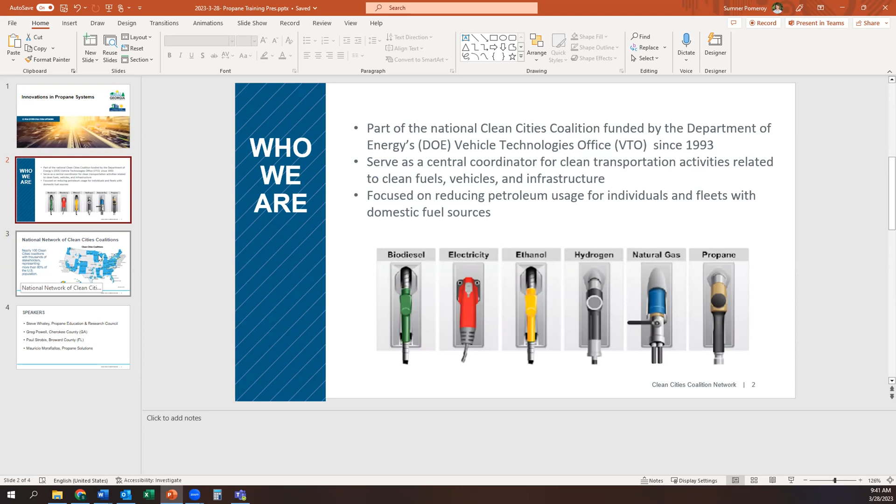Yeah, I could definitely do that - that we focus on all the fuels, not just one in particular. Yeah, if there's anything you want to add, essentially just jump in, but don't feel like you have to do it. I don't feel the need to be the only person that speaks, so I want to make sure your voice is in this as well.

You're so cute, I love it, Sumner. Well, what I was thinking too is you introduce yourself, then I'll go, and then you can go into who we are. And then if you want, you can go to the next line and I'll jump in and say, we have nearly 100 coalitions across the country. Here's a map of all our designated clean cities coalitions - notice me in Southeast Florida. I know, that's what I was thinking - a little difference between Florida and Georgia is that we have multiple coalitions where you guys have a state run. And then I was thinking, did you want to do the next slide and say the speakers, on the agenda today we have, blah blah blah, and do that.

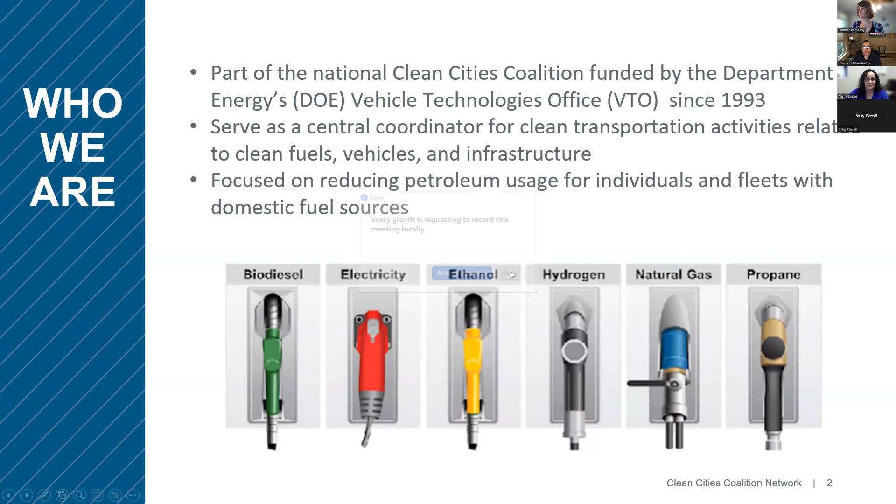And just to give you a little background, we do have a national network of Clean Cities coalitions. We have nearly 100 coalitions across the United States. As Sumner mentioned, her coalition covers the entire state of Georgia, whereas ours is a little different. We have 4 coalitions within Florida that cover the most populated areas, which we're looking to hopefully expand within the Panhandle.

Our agenda today: we have Steve Whaley from Propane Education and Research Council, then we'll get into Greg Powell at Cherokee County up in Georgia, then Paul Strobis from Broward County, Florida, discussing his paratransit fleet, and we'll finish with Mauricio Morafilalos with Propane Solutions. I'm going to go ahead and pass it over to Steve.

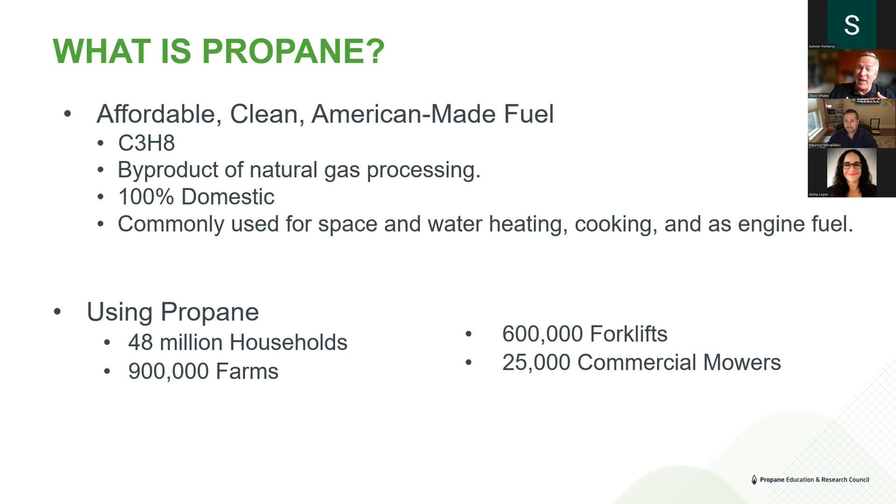But a lot of times we get confused with CNG, which is our sister fuel, natural gas. We are one of the natural gases, the methanes, the pentanes, the ethanes, the butanes, the propanes. All of these we get out of our own soil here in the United States.

But we operate as a liquid. So when you shake your grill cylinder while you're getting it refilled and putting it back up underneath your grill, it is a liquid inside there, and it stays a liquid unless you put it in 42 degrees below zero. Then it starts to boil off. So we keep it at about 100 psi on a 60-degree day, and it stays there. It's not very much pressure at all.

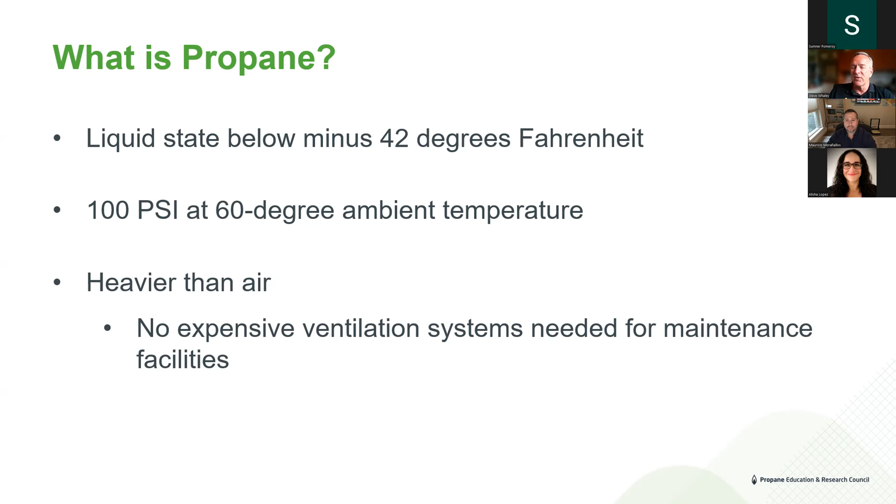It's heavier than air. So if you're working on vehicles inside a maintenance facility, you don't have to put the methane detection at the top. You don't have to do the evacuation of that air and all of those very expensive things. If you're certified for gasoline and diesel, you're going to be fine for propane because it has the same properties of being heavier than air. So you don't need to spend all that money, but it is a very hydrogen rich fuel.

I like to call it a stable hydrogen fuel because we stabilize it with those 3 itty bitty little carbon atoms that are in that, surrounded by 8 hydrogen atoms, unlike gasoline and diesel, which are very heavy on the carbon side. And that's one of the things that we're trying to get rid of.

But we have 2 sources of propane, regular propane and renewable propane. But we'll talk a little bit about renewable propane at the very end. But both of them operate exactly the same way because they're the exact same molecule, just come from different feedstocks.

But both of them are non-toxic. They can't contaminate the water. They can't contaminate the air. They can't contaminate soil. So the EPA doesn't even regulate our fuel stations because they can't hurt anything in that regard. Unlike a gasoline or diesel tank that can seep and you have to spend millions of dollars to clean it all up. Propane is non-toxic.

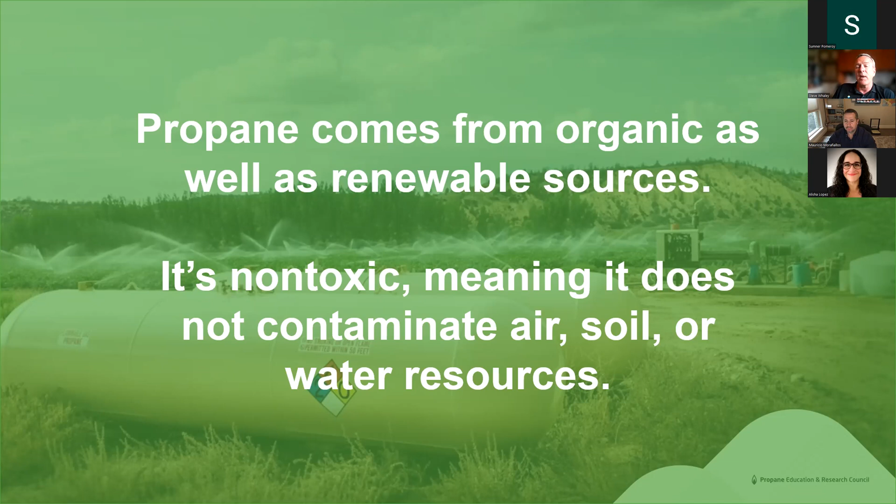You can breathe it. We add a little bit of stink to it. So if anybody can smell it, that way we know we have somewhere it might be leaking.

Everybody has a pathway to zero, every alternative. And I am so glad Clean Cities is fuel agnostic when it comes to this, promoting electric, promoting CNG and hydrogen, and of course, propane.

Our pathway to zero for propane goes like this. We have 2 toxic emissions that we're very worried about, particulate matter and NOx. These are the ones that cause the respiratory illnesses for kids on school buses that get real close to those diesel exhaust fumes. We have no particulate matter filter that goes on our engine because we don't have the particulate matter. So that's kind of a gimme.

We're real good there. NOx emissions, West Virginia University, same people that busted Volkswagen, say that we're 96% cleaner than the best in class diesel.

In other words, the same diesel bus, same propane bus, same make, model, year on the same route - they put mobile emission equipment on there to find that we were 96% less in NOx. We have a tremendous amount of reductions, especially with some new engines that were coming out.

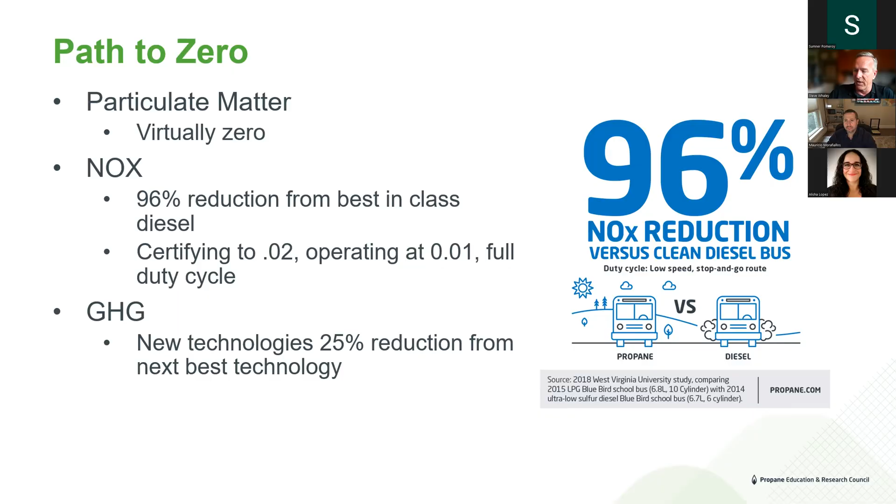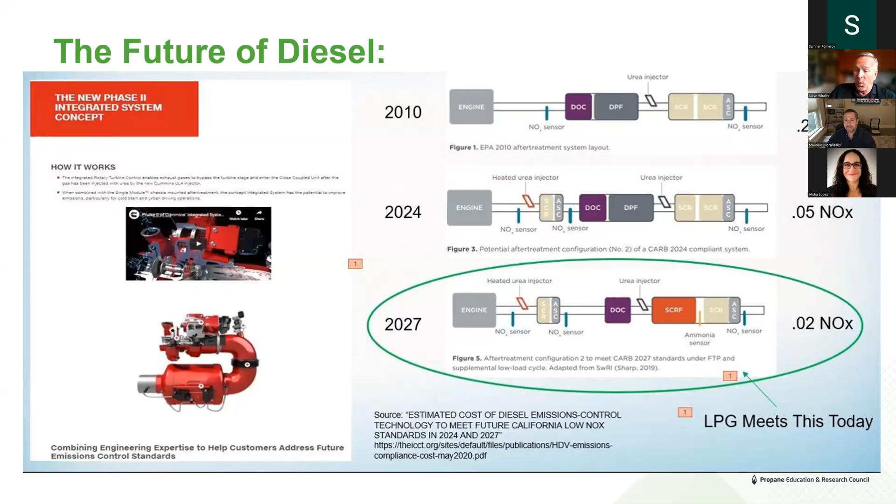Diesel is on kind of its last legs. We're under the 2010 regulatory level of 0.2 NOx. So if we're right here with 0.2 NOx in 2024, we're going to reduce that by 75%. So if you love diesel emission reduction equipment now, you're really going to love it in 2024 because they're going to have to reduce and add a whole lot more to get it all the way down to 0.05. Then in 2027, it gets cut in half again to 0.02. Propane engines today are already operating at 0.02, so we're way ahead of the curve as far as emissions go.

Roush Cleantech is one of the vehicle providers. This is if you're ordering a new vehicle, whether it's a strip chassis, a cutaway, or one of the trucks all the way up to an F-750, or the Blue Bird school buses - Roush puts their 7.3 liter engine in all of these platforms, and again, it meets that 0.02.

If you have existing gasoline vehicles that you'd like to turn over into propane, folks like Alliance AutoGas have thousands of EPA certificates of conformity for various platforms - Ford, GM, Isuzu, Chrysler - including a very popular one, the Ford Transit.

School buses is where we've had a lot of success. We have over 1,000 school districts now operating on propane, and once they get started, they don't stop.

Just a couple of weeks ago, Randolph Township in New Jersey reached its full 100%. I've got Kay Cornelius in Upper Minnesota - she has the largest school district by square miles, 4,200 square miles she covers, and 95% of all her routes are covered by propane.

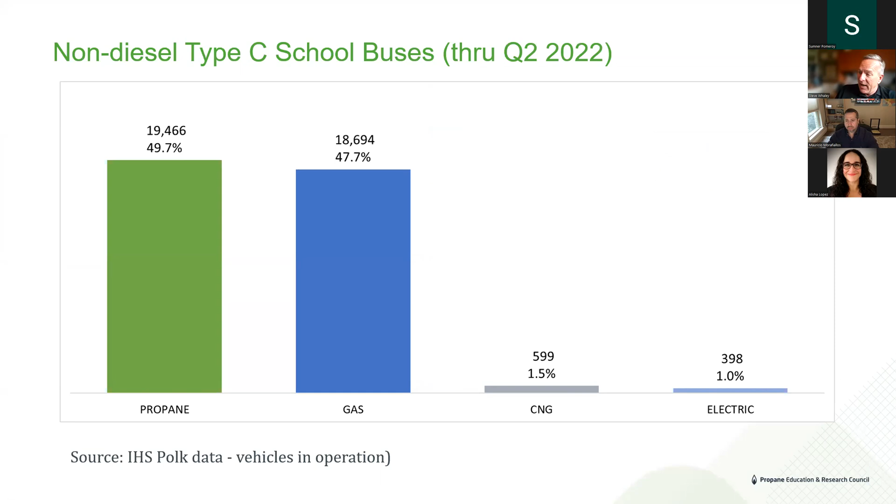We move over 1 million kids every single day, but 22,000 school buses operate on propane today. Just to give you an idea, as of Q2 2022, the Polk data revealed we had 19,000 of those on the Type C platform. Gasoline is in there as well. CNG has almost 600, and electric in the Type C had 398. That gives you an idea - electric buses came out about 10 years ago, and so did propane.

So we've got a really good market success with that, but not just in school districts. Parcel package - we have UPS, we have FedEx, we have DHL, but the latest one to come on board were the contractors for the United States Postal Service. They handle 70,000 of the 92,000 routes there on these Class 6 and 7 straight trucks.

And just for you Clean Cities folks, I know you get graded on the number of gallons that you displace - these trucks are averaging 18,000 gallons of fuel a year per truck. They drive 7 days a week, they slip seat these things, they're driving 24 hours a day. So if you want to displace a lot of diesel, you can do that with propane with the United States Postal Service contractors.

Nestle Water started about 5 years ago with 5 trucks, kind of like a little PR campaign. Well, they found out what they could do with emission reductions and fuel cost savings. Now there's 1,300 of these water delivery trucks that are out there.

Paratransit's been the same way - they're averaging about 600 gallons a month nationwide. Greg and Paul will tell us a little bit about what they're doing. But just to give you an idea, chassis costs have gone up tremendously, and Greg can attest to this as well as Paul - for a gasoline version, you're going to spend about $165,000, for a propane version, about $195,000.

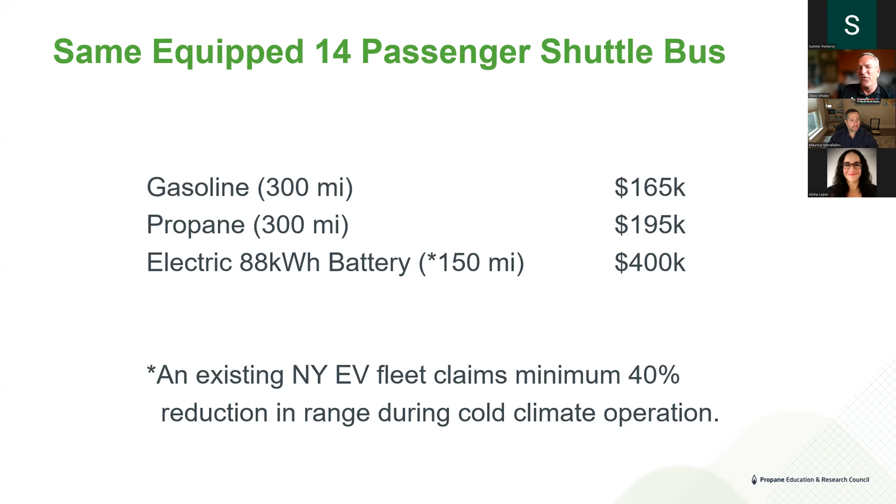That might be a little bit high, but I'd rather go high and meet expectations a little bit better. But on the electric side, you're really going to spend a shiny penny for that, and maybe not go quite as far. One of the fleets in New York doing this put out some numbers recently showing they lost about 40% of their range going to electric when the weather started getting cooler.

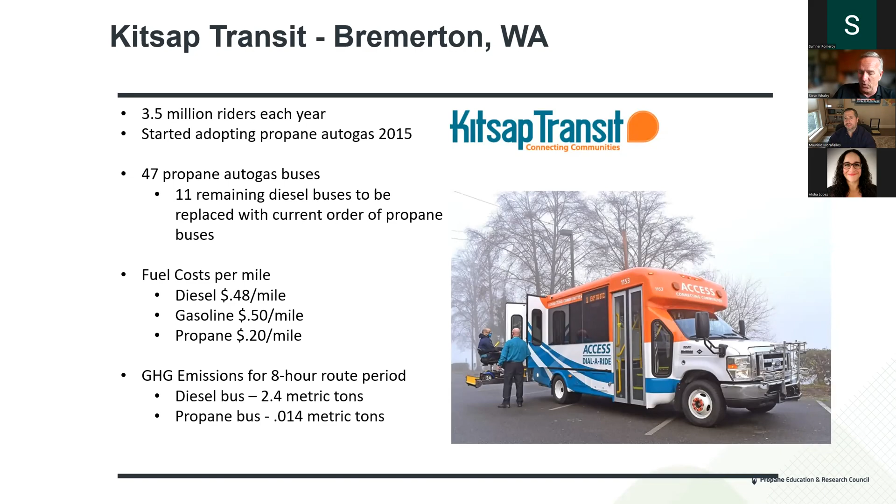That's pretty good, but look at the greenhouse gas reductions he's been able to achieve. This sustainability officer has measured 2.4 metric tons per diesel bus, and for propane it's 0.014 metric tons. So we're doing a great service there in Bremerton.

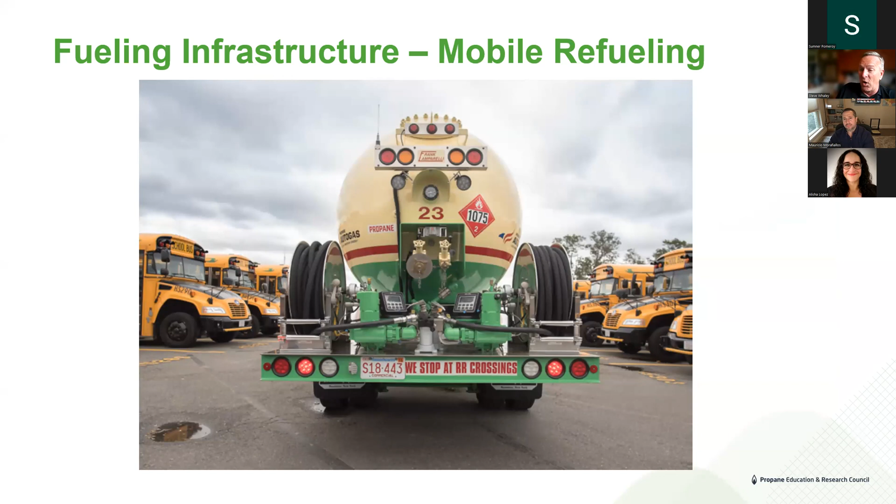Infrastructure. Now we're going to have Mauricio talk about the really cool infrastructure, but we have 4 types. We can do mobile fueling like the city of Boston does every single night on 400 buses. A bobtail truck comes in and fuels them all up because they don't have room for a fuel station anywhere in Boston in their parking lot.

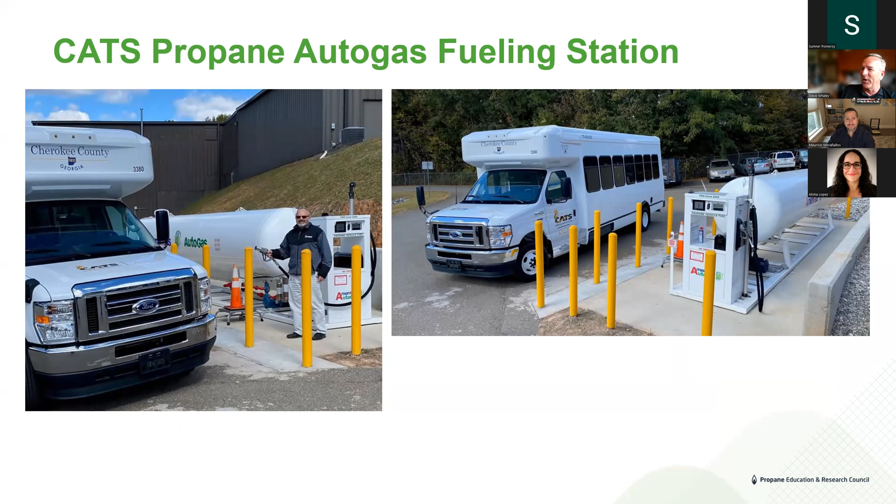We can move it around on temporary trailers to get it where people need it, but everybody wants one of these. This is our friend Greg Powell out in Cherokee County. He's filling up his buses for the first time. We're going to have him talk about what's going on there as well.

But up in Pennsylvania, everybody wants one of these fuel stations behind their gates so their own drivers can fuel them up, park them, and have that autonomy—not having to go to gas stations, not having to get coffee and donuts and everything else, but fuel up right there safely and very affordably.

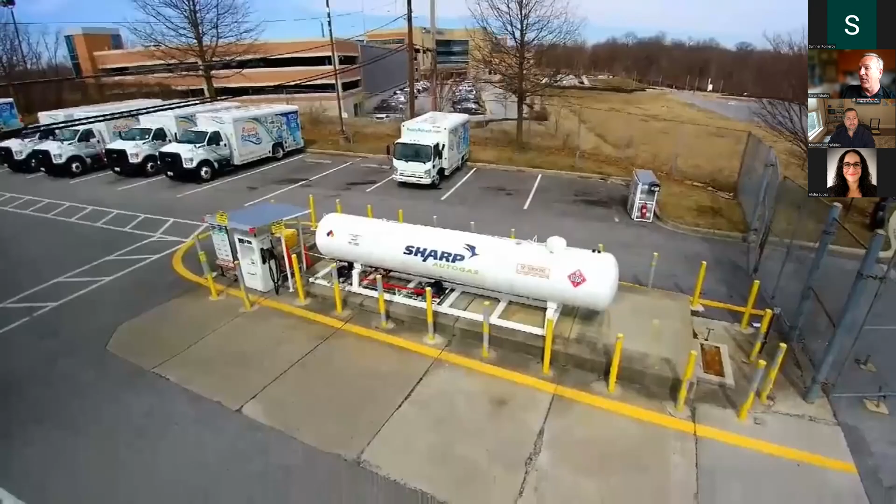This is in Baltimore with those Ready Fresh water delivery trucks, a 2,000-gallon tank. This setup here is about $50,000. Everybody in the propane fueling business will give these away if you sign up for a fuel agreement with them and lock in a price for 1, 2, or 3 years. You get a price you like, as well as the stability of that, and a fuel station that's maintained by that fuel provider as well.

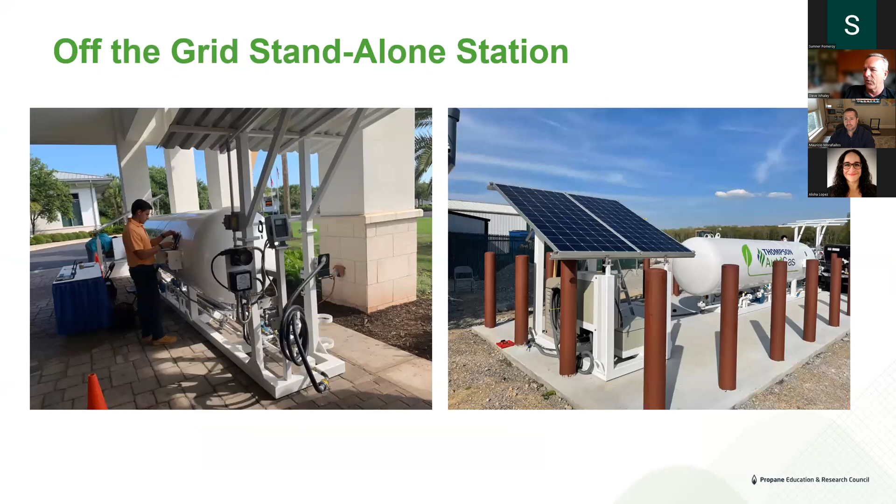Different configurations. When you get up to 600 or 700 buses like they do in Texas, they have three 30,000-gallon tanks behind there, but the same dispenser is operating and filling it for drivers to be able to fill up. I'm not going to steal Mauricio's thunder—this is a little bit more about his system.

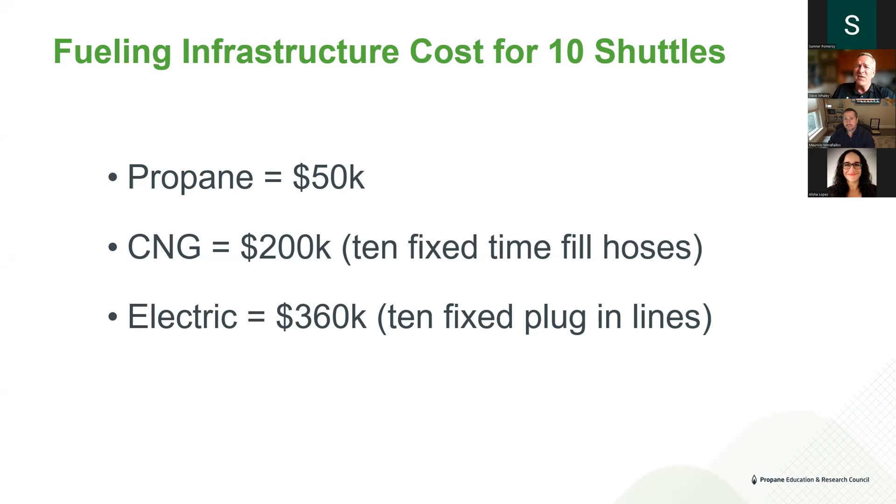Just to give you an idea of that cost comparison on infrastructure, it's one of propane's greatest assets because we can set up this infrastructure anywhere, even in the most remote areas—very resilient. We move propane in pipelines, in rail cars, in transport trucks, and then all the way down to what we call these bobtail trucks with 3,000 to 4,000 gallon barrels. The important part is in a storm or any kind of catastrophe, we can use these trucks to fill up, because we have intermediate storage of propane in every single community in these United States. Even though it moves on rail cars, pipelines, and trucks, we store it intermediately in what we call bulk facilities, so we can pull it from there without electricity, and put it in your facility without electricity.

Future of propane, renewable. But before we get into renewable, let's just look at the carbon intensity of what the EPA says about regular propane and the regular grid. The grid is very diverse in its energy sources, but when you average all of the wind, solar, hydro, coal, natural gas, and nuclear, you have a carbon intensity assigned for every single state.

Hopefully nobody here is in Wyoming—326. I'm not sure why we would want to do an electric vehicle there. But then you have really, really clean states in the Pacific Northwest because of the hydro, and even in Vermont. Vermont's the cleanest state for electricity in the United States.

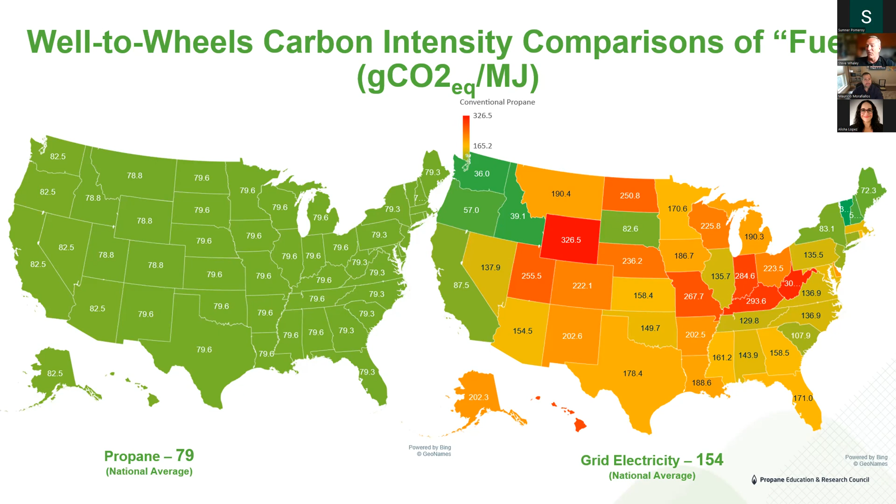The grid intensity average for propane is 79, versus 154 for EV. So let's look at what that looks like in Georgia. I did this analysis for Georgia, but not for Florida yet—I can do that for you later. I wanted to measure what regular propane operating those vehicles would look like in Georgia. We're minus 7.3 tons of CO2 less than the same electric mid-duty vehicle operating 200 miles a day, and 0.08 less in NOx than the electric vehicle getting charged in the state of Georgia.

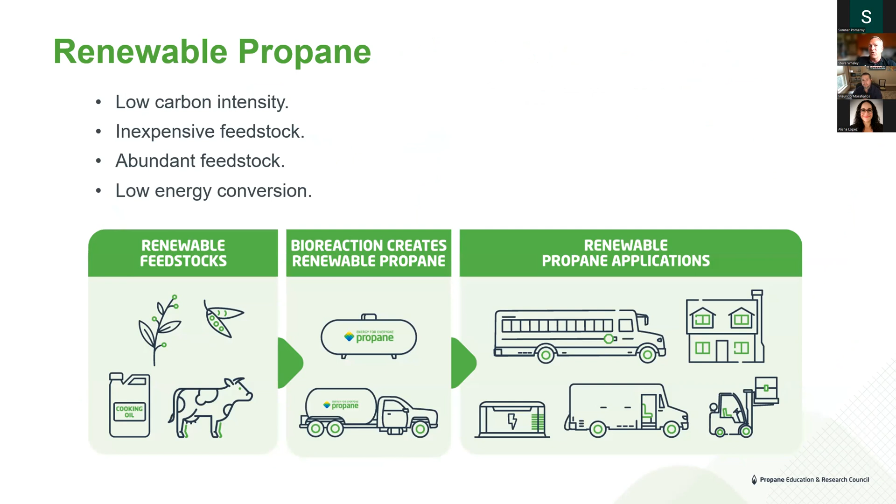But renewable propane is exactly the same infrastructure-wise. It's very low carbon intensity because of the pathways involved—we use cooking oil, dairy manure, canola, all kinds of feedstocks. But it's the same infrastructure, the same engines, nothing changes. If you're using regular propane now, you can move into renewable propane anytime.

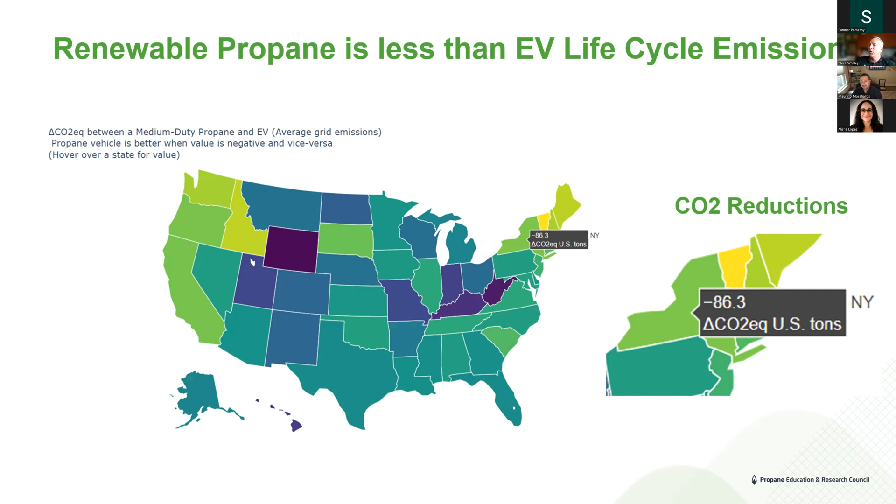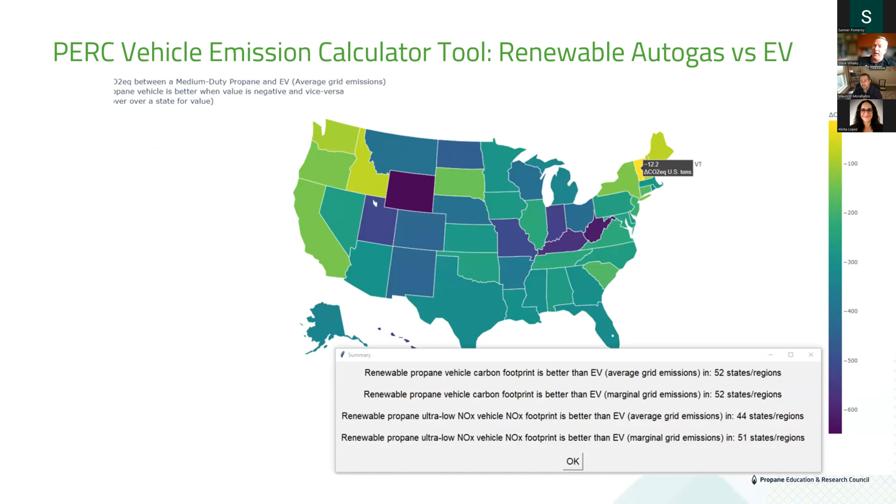Even in the state of Vermont—well, actually New York has the cleanest grid—when we use renewable propane, it's 86 tons of CO2 less than that grid. Here it is in Vermont, the cleanest electric grid on the planet because it's all hydro. We're 12 tons less CO2 when we use our renewable propane.

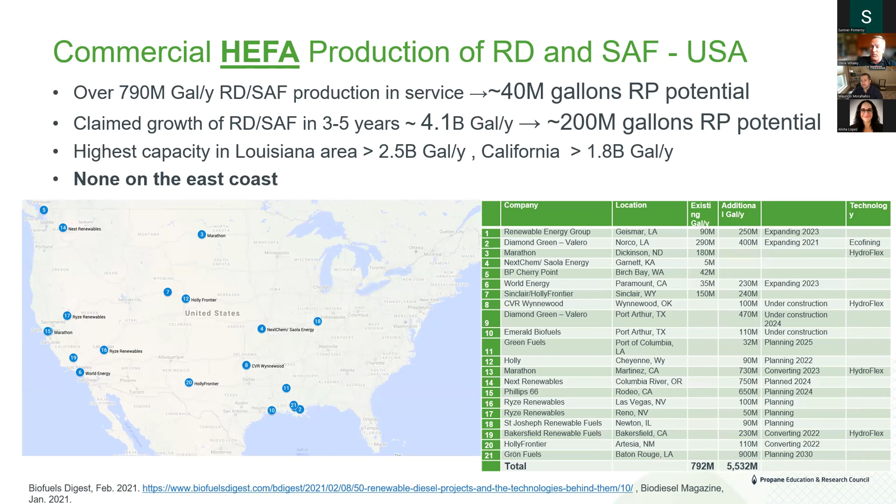We have renewable propane coming up all over because of its popularity with renewable diesel and renewable jet fuel. All these manufacturing facilities are coming up—New York, Sacramento, even just south of Richmond, Virginia, in Petersburg, where we did a ribbon cutting. They wanted their entire municipal fleet running on renewable propane as well. Up in New York, we've got it on rail cars going straight up there.

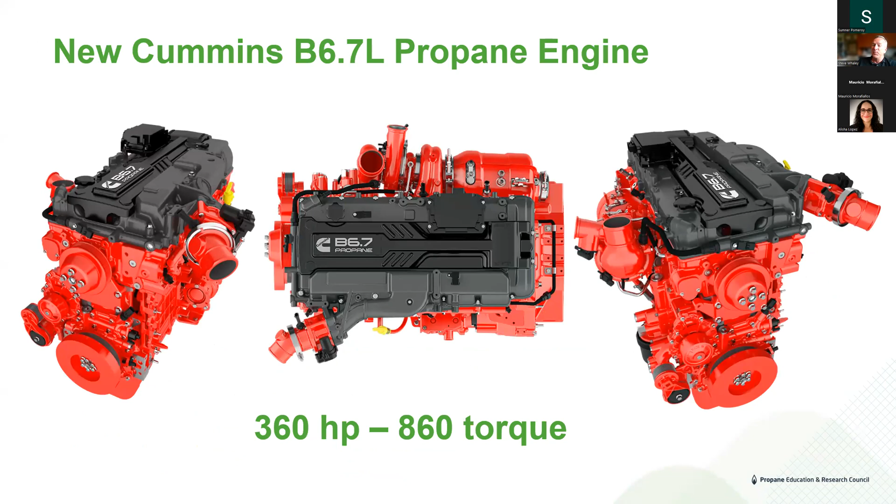Not just the fuel is changing, but we also have major engine developments. The Cummins new engine, the B6.7 propane, was announced just last year and is coming to market in spring of 2025. It has the highest horsepower and torque rating of any in that class, and it even beats diesel—they had to tune it down a little because they're a diesel company. This 360 horsepower, 860 foot-pounds of torque engine is a beast for medium duty trucks and buses.

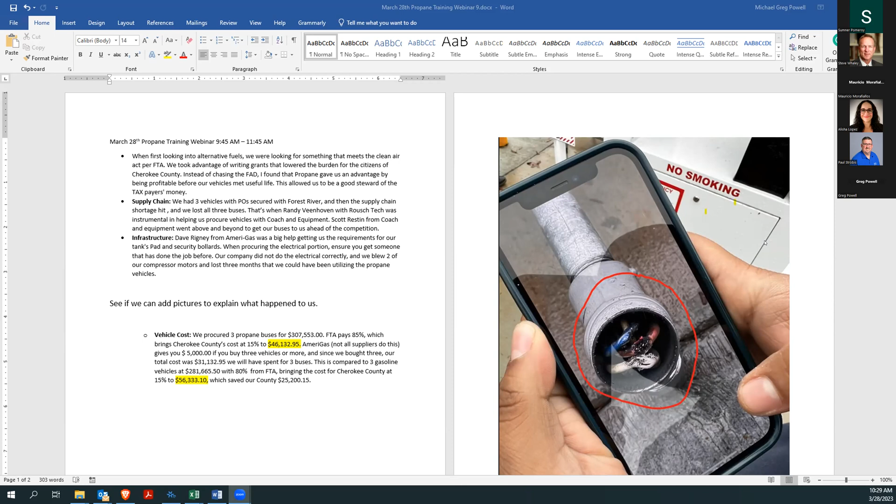And actually, Steve showed up for the ribbon cutting. So really, we didn't get started with our propane day-to-day operations until January of this year. So that's the kind of time delay that it can cause you. I just say in that process, be aware of what can happen from the installation standpoint.

But from the cost perspective, when you're taking advantage of FTA, they'll do a 90-10 split on that, so that actually helps you. Only 10% for the county. I think it took us about $22,000 for everything on that, so it wasn't too bad.

Then I'll go to something from a positive standpoint. If you look at buying propane buses, like I bought these 3 at $307,000 at an 85% FTA grant, that's 15% for us, for Cherokee County as a citizen. That's $46,132 that we had to put in.

Then we talked with Dave Rigney from AmeriGas, and they're actually local to us. So by using AmeriGas, if you buy 3 buses or more in the first year, they'll give you $5,000 per bus to help with the cost. So that took us down to $31,132. When you compare that to gasoline buses, we had 3 gasoline buses at $281,665.

At a 20% split, that was $56,000. So you look right off the bat, we're already beating the money just on that 85-15 split right there. Then when you take advantage of the propane, it saved our county $25,200. So when you go to sell this at the BOC or to your bosses, it's hard to say no to that, especially since you're meeting a green initiative and you're able to be profitable within the useful life of the vehicles that you have.

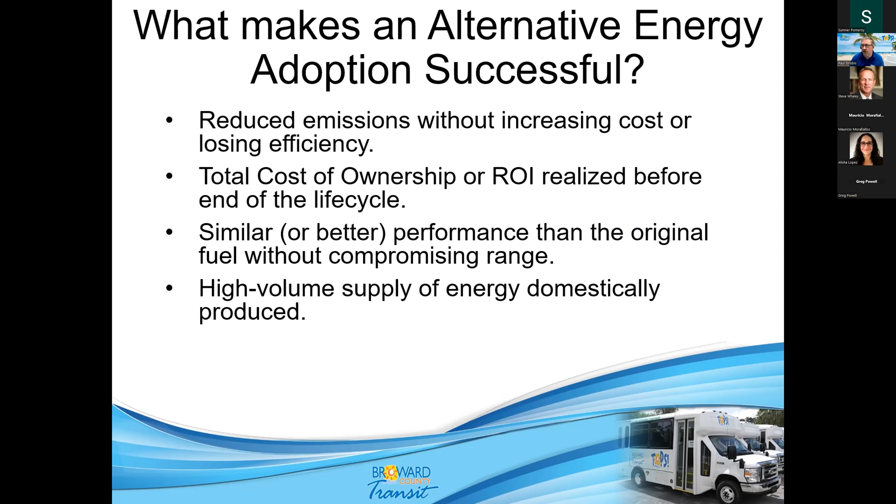So, as Steve mentioned, it's the most cost-effective fuel source to reduce your NOx emissions. It does have the lowest cost of ownership, and I'll illustrate that with some financial information later on. The range that you can get compared to the other models—for me, the biggest benefit of propane in the paratransit industry is the flexibility of the fueling infrastructure.

So as a paratransit system, we contract out our service. We run public procurements for companies to operate our service—private entities bidding on this work. And so the vendor that I use to deliver this service will change every 5 to 7 years based on the procurement process. So looking at some of the other fueling infrastructures that are more permanent and more expensive would be very difficult to relocate if I were to change vendors.

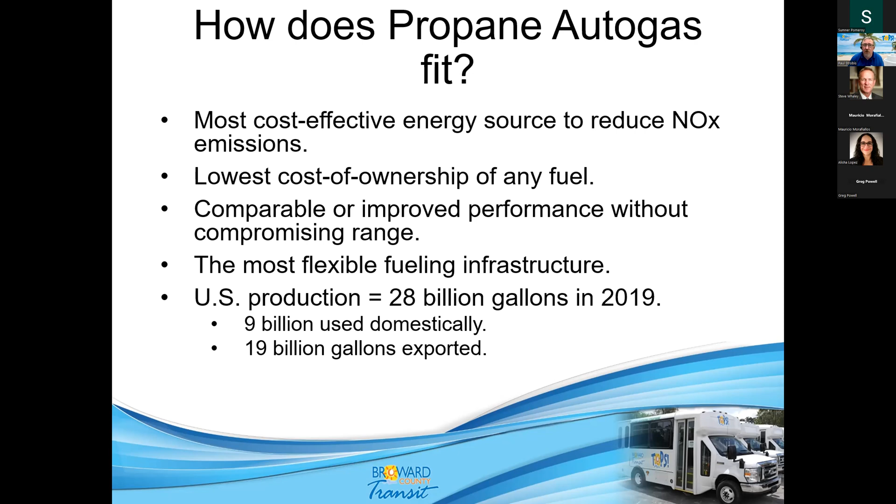Having the flexibility with propane was a big selling point for me. As Steve mentioned, from a resiliency standpoint, we're on the hurricane path every summer. Having a fuel source available when you couldn't buy a gallon of gasoline anywhere in Florida helped us in our role as an emergency evacuation service for our citizens here in Broward County. Seeing that it was domestically produced reduces our dependency on foreign oils, which met a lot of our county commission goals. So the benefits of that program really showed for us - propane was the way to go. But what do you need to consider if you want to do it?

Steve mentioned propane.com, the Clean Cities folks. You need to be knowledgeable because there's a lot of fears and misconceptions with propane.

Take a look at your vehicle type. Steven mentioned Roush has a system, Alliance AutoGas has a system for aftermarket conversions. I use another vendor called ICOM North America, very similar to the Alliance aftermarket. So any vehicle style you may operate today, you either have an OEM option or an aftermarket conversion option if it's a gasoline vehicle, because they both have hundreds of vehicles that are EPA certified systems.

Your infrastructure - as Steve mentioned, you can mobile fuel if you need, like Boston does. I've got an agreement with AmeriGas, who's a local provider here. I'd recommend anybody who wants to go with that find a vendor with a large amount of storage in your local area. AmeriGas, for me, has hundreds of thousands of gallons of local storage in my county, so that even in a storm there's no interruption in our fueling capabilities.

Obviously the benefits to the environment that Steve mentioned, and the budget impact. As a taxpayer-funded service, we are the most expensive passenger service that a transit system can provide in paratransit. So being able to save any money in our operating budget or capital budget allows us to provide more services to our senior and disabled populations.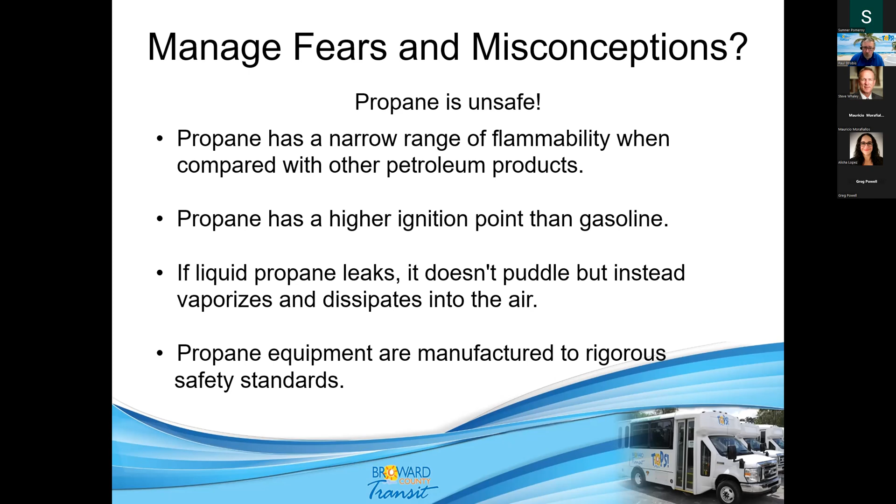So I went out, I didn't do a trickle effect. I bought 138 propane buses back in 2014. We were going all in on this system.

And then this happened to me. Two weeks before go-live, pulling out on service, I had a vehicle fire and everybody pointed to the propane. I'm happy to tell you this was an electrical fire in the engine, had nothing to do with the fuel source. But the biggest takeaway is the safety features in the Roush system operated exactly like they were supposed to. When you shut the ignition off, the propane goes back to the tank. I climbed under this bus at the end of the fire and there was still three quarters of a tank of propane in the tank - very safe system. Even with a full fire like that, the fuel source never ignited.

So I talked about vehicle types - here's a mix of the vehicles I've had in my fleet over the years: coach and equipment. Our cutaways that we get from Champion Bus use a Roush OEM system, a monofuel propane system. The transits, unfortunately, Roush doesn't have a system that fits that transit engine - we've got both the 3.7 liter and the 3.5 liter turbos. Our ICOM partner has a system for both of those vehicles for us, an aftermarket bi-fuel solution. Ford Tauruses, same thing, aftermarket bi-fuel system. The MV1s were gasoline, but we've retired those out. So now we're 100% with the other three body styles of propane powered vehicles.

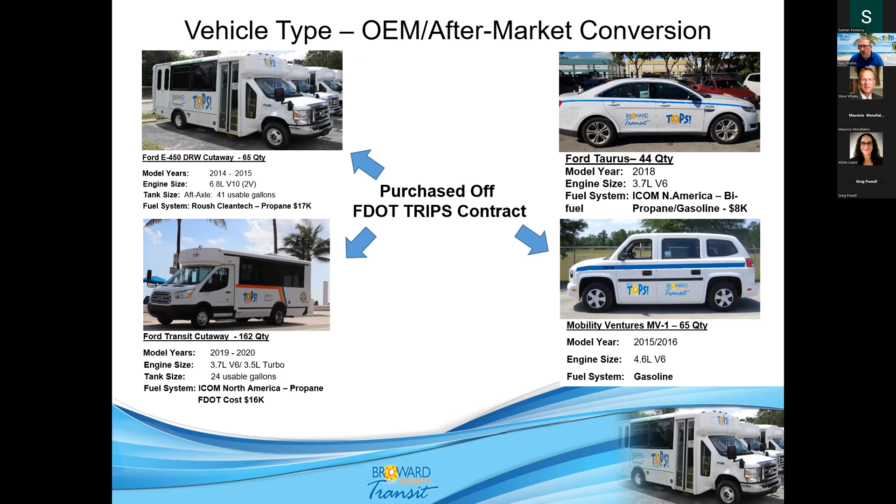Fueling infrastructure, as we mentioned, bobtail, for me this was the best option. I've got a driver who runs out of fuel because he's not paying attention to the fuel gauge. AmeriGas can dispatch a bobtail, fill it up, and get it back to the garage if needed.

When we had the hurricane last September that wiped out the west coast of Florida, we were mobilizing to assist getting people out of the Fort Myers and Tampa areas. We were going to use our propane buses, and our partner at AmeriGas was ready to stage a bobtail along Alligator Alley, which cuts across the state, so we could top off and make sure we had enough range. With the power down on the entire left side of the state, we could get over there, help people, and use these types of trucks to help keep our vehicles moving back and forth.

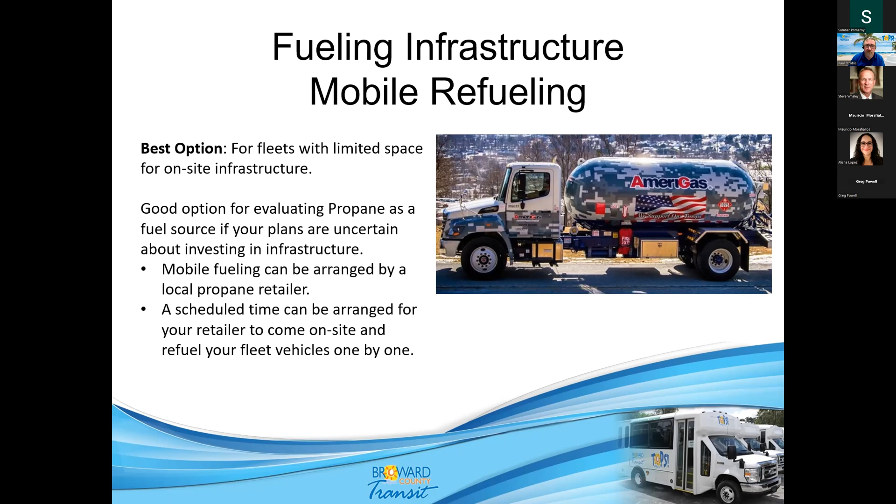Steve mentioned mobile fueling. We had an issue with a dispenser that went down. While AmeriGas was repairing that and waiting on parts, they were able to bring in a flatbed like this so that we didn't have any interruption in our capacity to fuel our fleet, which today is 337 vehicles operating in Broward County.

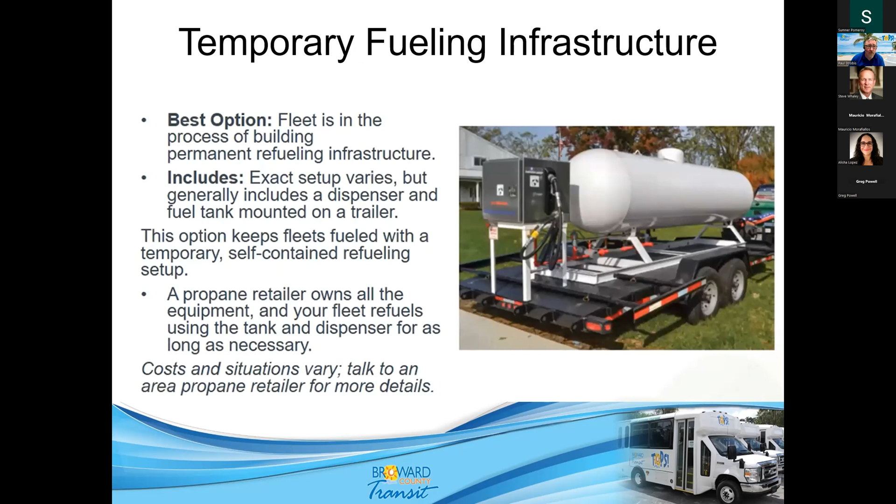So this is one of my stations that we put in at our vendor's location. Two 1,990-gallon tanks with 2 dispensers. Each of my providers had a station like this.

Our contract with AmeriGas includes them installing the full system for us and maintaining it. This system didn't cost me any capital outlay—it's all included in a per-gallon usage contract, and AmeriGas maintains the system for us and continues the fueling.

So all the pad, the bollards, the electric—that can all be included in a bid. And if anybody needs any help with that, I can share a spec if you want.

This system comes with an online fuel management system as well. It can tie into an existing system if you need to, but AmeriGas is partnered with Superior Energy Systems, which provides us a fuel fob for every single vehicle so that we're able to track the propane by bus, which helps us with our reporting.

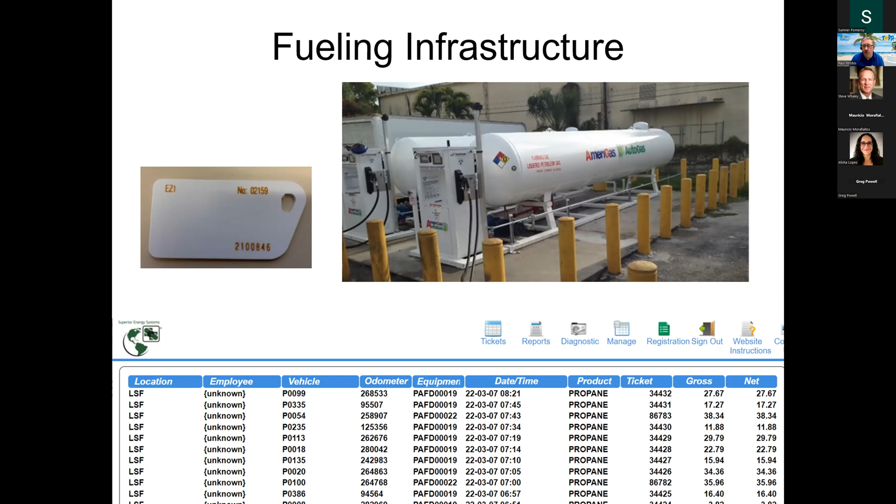The one thing you want to look at is your range. And while the vehicle range is comparable, you may not have as many options for fueling, so take a look at strategically placing your stations.

After the first 5-year contract with AmeriGas, we looked at adding multiple stations, not just the one at the garage we had originally. We were able to expand our footprint to 4 stations to serve our area. Another benefit of that Superior fuel tracking system is I can use AmeriGas's dispensers and mine to fuel up our buses, and it's all being tracked on that same system. That's a big benefit for us here in Broward County.

I won't go too much into the green side since Steve really hammered that out, but we're using regular propane today. We've started conversations with AmeriGas to move to renewable propane in the near future to get as clean as possible. Being that I'm 100% propane now, Alicia needs to be able to report reductions, so this is the only way I can do it—I don't have any diesel or gasoline vehicles to convert. I'm already at 100%, so renewable propane for me is the future. We're looking forward to that coming up soon.

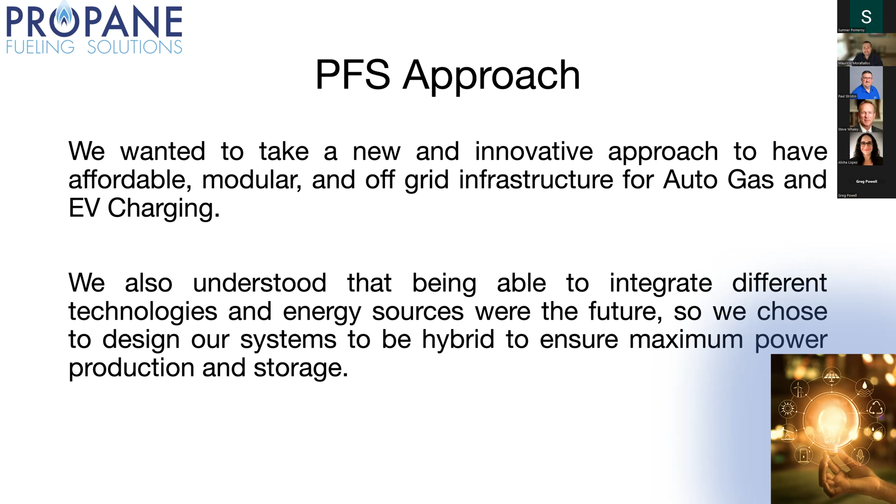So what we saw is, can we make a solution that is modular, but not just modular, also bring an approach that not just helps on the mobility part, but also helps to push and promote our goal of net zero. So what we did is a little bit different approach. We said, can we combine propane with alternative renewable sources? And that's what we've done. But at the heart of everything is propane, right? And why is propane so important? Well, it's clean. In the rest of the world, propane is not a secondary fuel source, it's a primary fuel source.

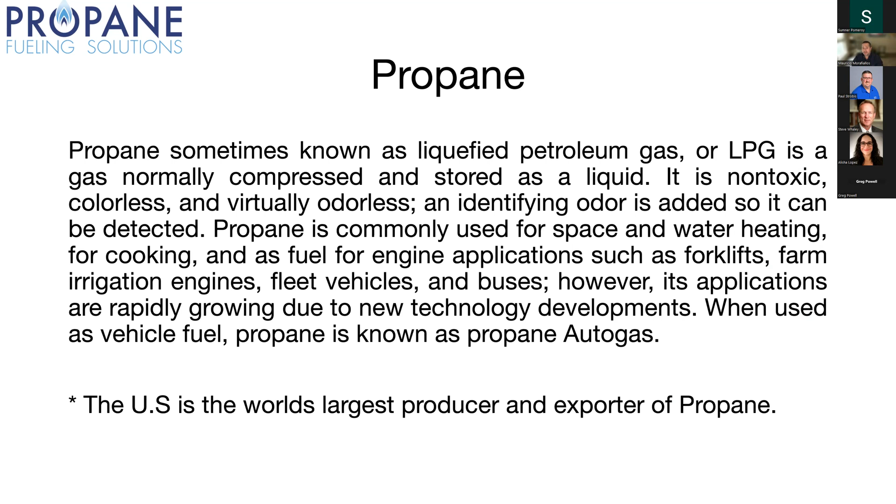If you go to Europe, if you go to Latin America, propane has been around for decades. It's really here in the US that it's taken a little bit longer to get some good traction, especially on the auto gas side. So why would we ever use any other fuel for our transportation fleets when we're the largest producer and exporter of propane?

These are the main four points of why propane is so important. It's easy, right? If you can fill your traditional gasoline or diesel vehicle up, you can fill a propane vehicle up. Very simple, very easy, very safe.

It's clean. I'm not going to repeat it, Steve's the expert on this, he's got all the great fancy numbers. It's just clean. Propane greatly reduces NOx. It's a phenomenal fuel source.

The third is it's proven. This is not something new. Autogas, especially around the world, has been around for a very long time. It is a proven technology, so it's nothing new.

And I think a very important one is the reliability and the uptime. No costly repairs, no special systems. If someone can work on a diesel engine or on a traditional gasoline engine, they should be able to work on a propane engine.

We have been really focused on the school districts, school buses, because we've seen that has been a really successful market for propane. Some numbers here in Texas: we have one particular school district that has been operating on propane for over 45 years, that's pretty significant. Today they have just short of about 600 school buses every day that run on propane, a pretty significant commitment to a clean fuel source. More than 23,000 buses today on the road, and about 1.3 million students are transported daily on a propane bus.

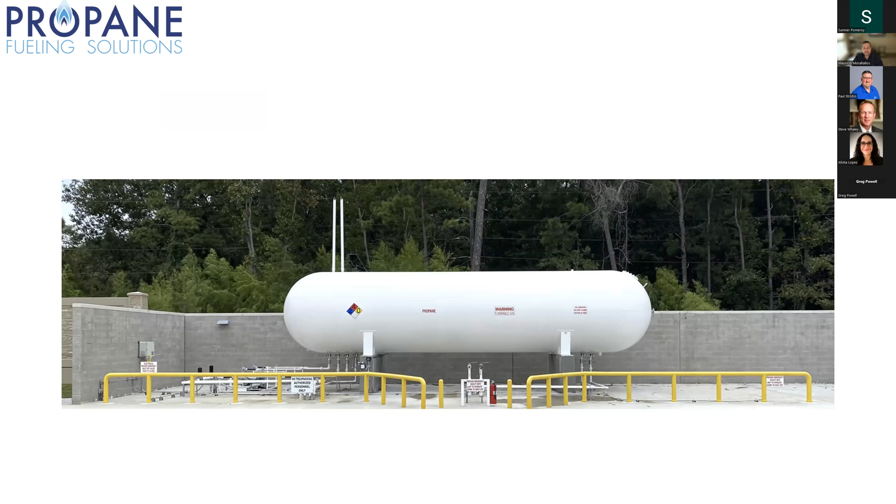So then we saw, how can we make this affordable for everyone? How can we make it so that smaller fleets, smaller school districts, can have a solution that's drop into place? What we see more and more every day is the need for modular infrastructure. There are a lot of skids today in the market, but what we hadn't seen is a skid that really integrated technology and safety into an all-in-one encompassing solution. And that's what we've done.

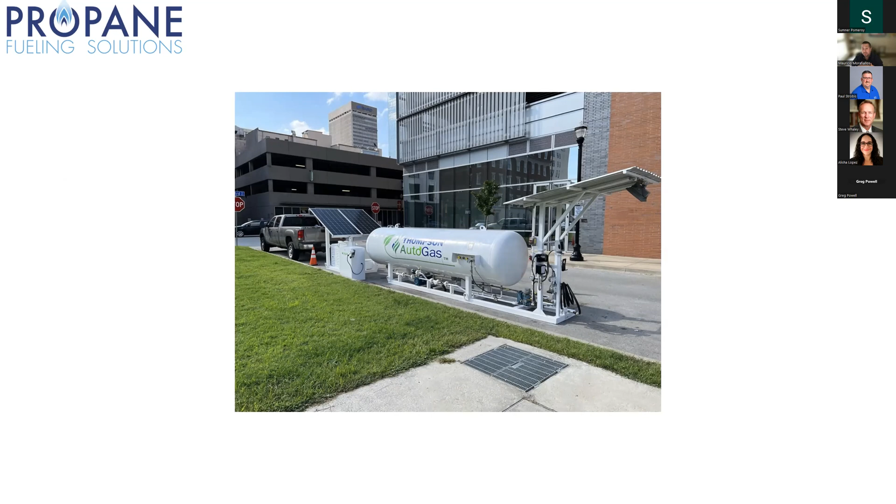What we've done is taken the approach of, can we make a system that's off the grid? Can we make a system that also can capture some sun, capture some solar, has a built-in fuel management system that is safe, that runs off of a telephone instead of a key fob?

So this is just a couple of photos to show you what a modular off-the-grid solution system looks like. Now you're not limited to, well, where can I put these? Well, I've got to get a permit, I've got to get electrical, I've got to do all of this. You literally can just show up, drop it in place, and walk away.

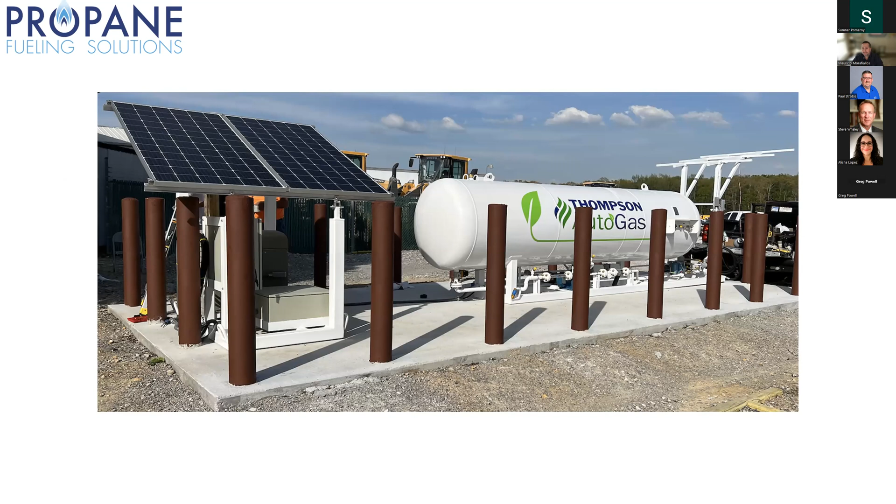This is our hybrid solution, which is solar, wind, battery, but at the heart of it is propane. And why? I know that today we're discussing propane on today's call, but I think it's important that we also need to know that electrification is here. We know it, and it's not going away. We can either work with electrification, or we can swim against that current, and we won't win. And when we're talking about being able to attain net zero, we want to be able to do that in a way that makes sense.

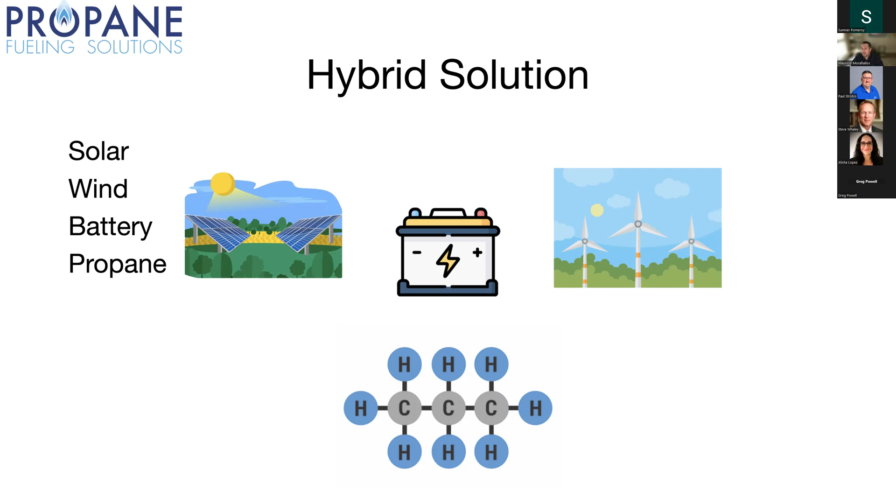One of the big things is power production. It's one thing to just plug into the grid, but the power still needs to come from somewhere. So just plugging in isn't the solution, but if you're able to make your own power, now you're getting somewhere. So what we've done is we've incorporated solar into our designs.

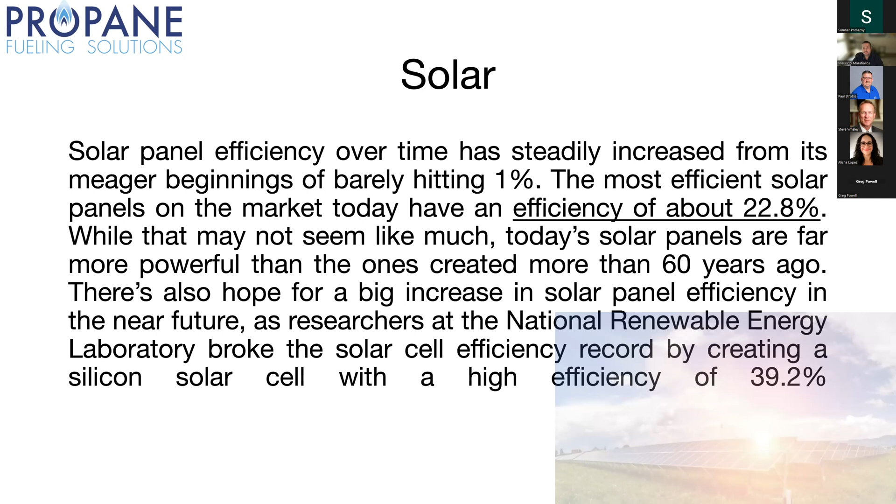We've incorporated wind turbines into our designs, and we've incorporated very smart lithium-ion battery technology into our designs of our skids. So what does this do? It's a diverse energy solution.

I'm in Texas. It's not a matter of if, it's a matter of when. Every year we get hit with storms, severe weather, hurricanes, tornadoes, all that good stuff. Here in Texas we have a thing called ERCOT - we wanted our independence, thought it'd be great not to be tied into the national grid. That hasn't turned out to be a very smart thing for us. We have a lot of problems, but with propane and with auto gas, we were able to kind of eliminate that problem.

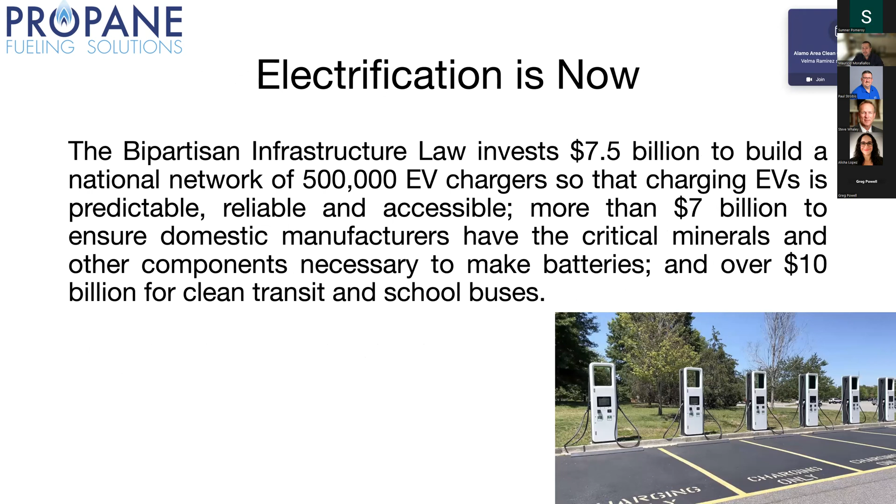Electrification is here, but nobody wants to make a big commitment. So how do we do that? Our approach is, can we provide a solution that provides fuel via auto gas on one side and allows you to also charge your electric vehicle? We think that's an approach that makes sense.

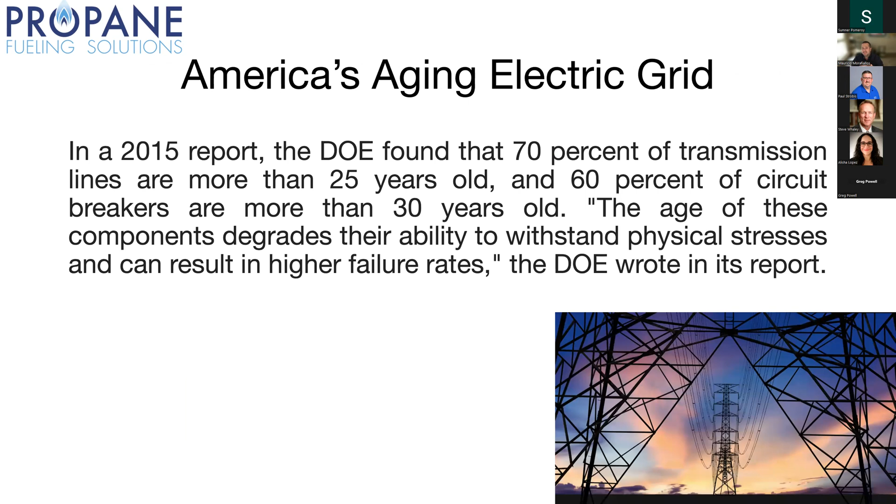So this is where we wanted to do an approach of, can we bring some common sense to this? And can we bring an approach where propane plays a very important role in this? We are making power. We're not just tapping into an existing power grid.

More natural disasters are on the rise every single year, so energy independence is very important. Being able to not depend on the grid is kind of a core value for us, right? Can we produce and keep vehicles running? Propane, it doesn't matter where you're at - you can always fill a vehicle, but you can't always do that with an electric vehicle. You can with our system.

So this is our solution. Our holistic solution is whether you have a propane fleet or you want to start to dive into an electric fleet and don't want to make that full commitment, our solutions are designed to be drop in place. They're designed to be scalable and modular, integrating the latest technologies and the best safety processes in the industry. And that's it.

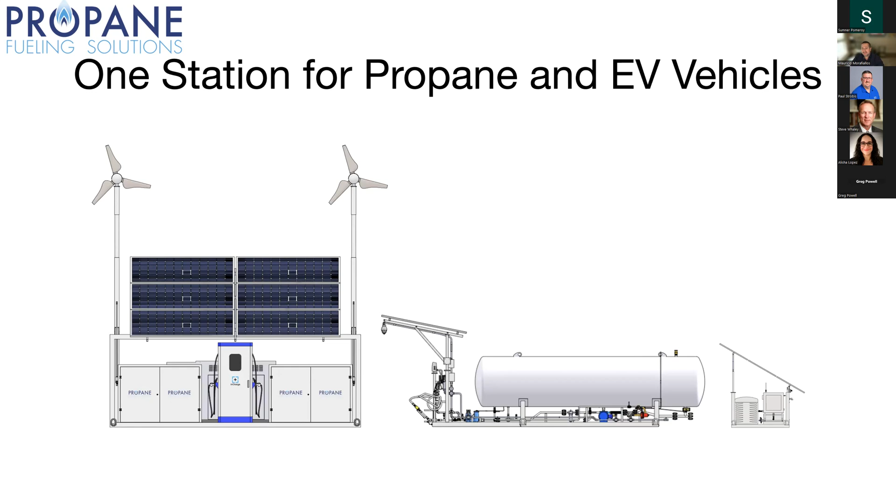If you have any questions, I'd be more than happy to answer them.